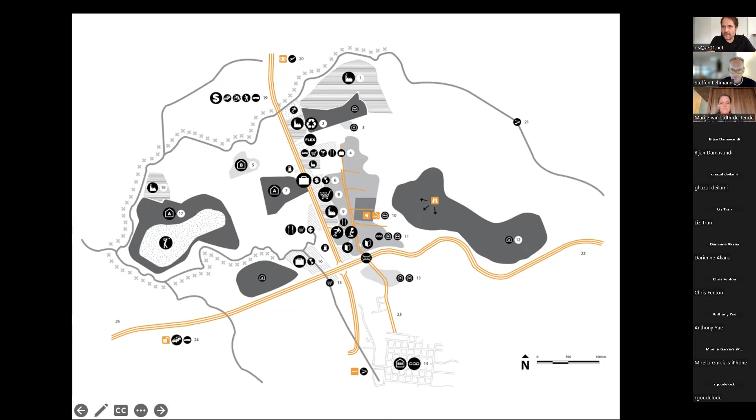You also see clearly the rivers surrounding it, and often in the case of the greater metropolitan areas, the rivers are viewed as borders. That's why we put crosses there. It's really seen as the border of the town, instead of looking at it as a potential high quality urban space. There's issues of insecurity, shown in the orange square with the lock, and there's also positive issues like nice smells that you have near restaurants.

With all of this, we created what we call a family of icons, and these icons represent both perception and behavior. Perception is the way people view the world, and we combine it with behavior and attitudes, how people use the surrounding urban space, how they behave towards each other. We're practically talking about culture, and that's why we focused on these two aspects and split it up into this family of icons.

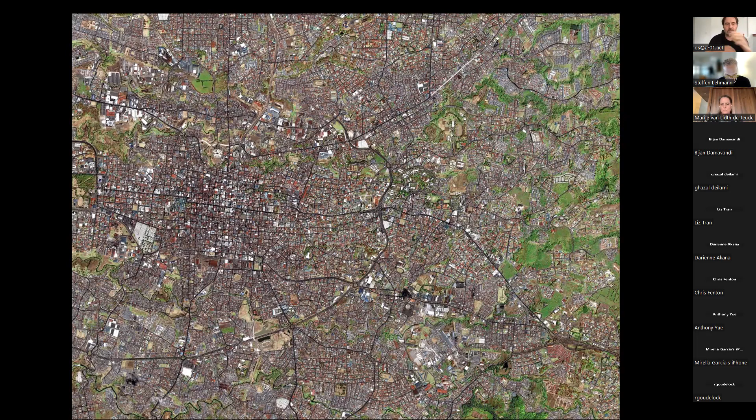We analyzed also this model of a city - we call it a city, the greater metropolitan area, but of course it's 4 cities combined. Actually, it's 31, because there are 31 municipalities in it.

We started comparing this also with other typical cities known for their widespread development, such as Los Angeles, which is actually only two-thirds of the territory of the greater metropolitan area but has 2.5 times the amount of population per square kilometer. We also compared it with other models like Manhattan, which has even 20 times or more the number of people per square kilometer on a much smaller footprint.

But of course, Manhattan depends a lot on the outside, for example agricultural production, whereas in the case of the greater metropolitan area, although it's called a metropolitan area, there's a lot of agricultural areas as well. So it's this urban hybrid, as I also said at the beginning.

We also analyzed ways people can move between the 31 different municipalities, 31 different towns, and the bigger centers of San Jose, Alajuela, Heredia, and Cartago, the 4 metropolitan areas, through motorized transport, but preferably collective motorized transport like buses, and even better the train, which at the moment we were doing this investigation was also reinstated in this area. Before that there was no train traffic, and now there is, but it's still quite limited - not near what we are used to in our countries of origin in Germany and the Netherlands.

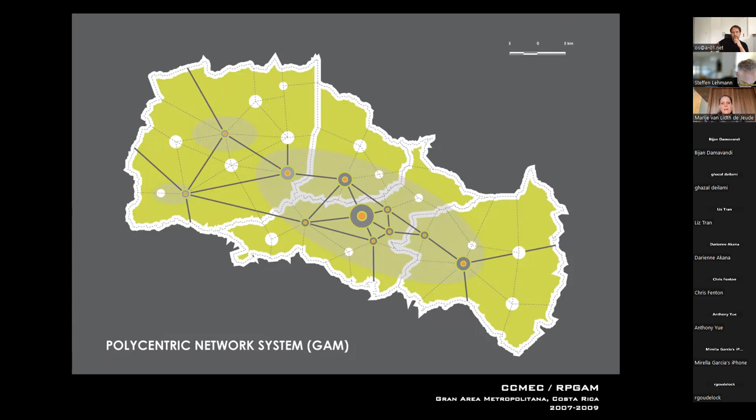And we analyzed also, okay, but how could these centers, these city centers look? How could we make that more sustainable by creating a multifunctional, compact urban center where people don't only live and then take their car to drive to the center of San Jose to work, or to go to the university, or to do shopping.

How can we create these functions within the limits of the city centers, and also use green arteries to mobilize ourselves and move from one place to another by foot or by bike, using non-motorized means of transport.

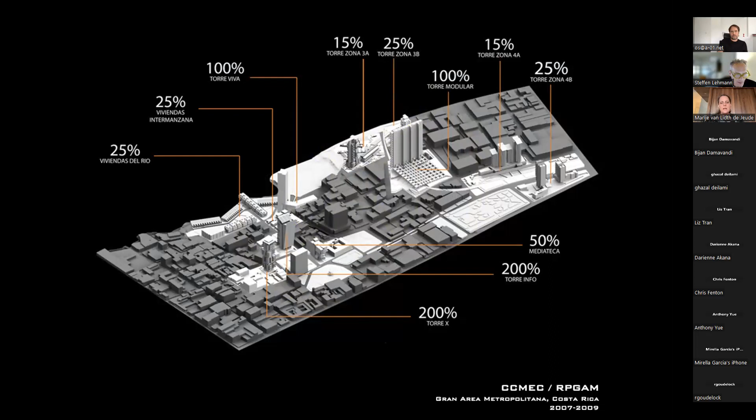Another analysis we did, and all these analyses we did with the University of Architecture in Costa Rica, looking at different concepts and models together with a group of architecture students. Here we see an analysis of different urban acupunctures and the densities that could be created, and how this could look in one of the centers of San Jose, the central districts of San Jose.

Here's an image of the same area where we also look at what is called the Trama Verde, looking at how to connect different green spaces within the city through green arteries, often rivers. There's 870 kilometers of rivers only in San Jose, but also through streets which have a lot of trees.

And these green arteries are not only interesting for moving from A to B, or for recreational purposes or sports, but can also be used for commerce and for institutional purposes or even production of food, for example.

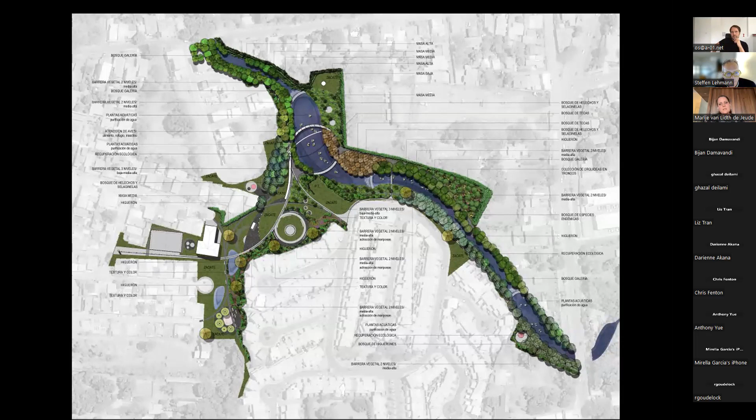And we made an actual project for this as well in the city of Ciudad Colón. That's where we are living. We worked together with the communities bordering a river called the Pacacua River, through a participatory design process where we included all different sectors of the population, with various sessions where everybody could indicate what they would like to have in this urban river park.

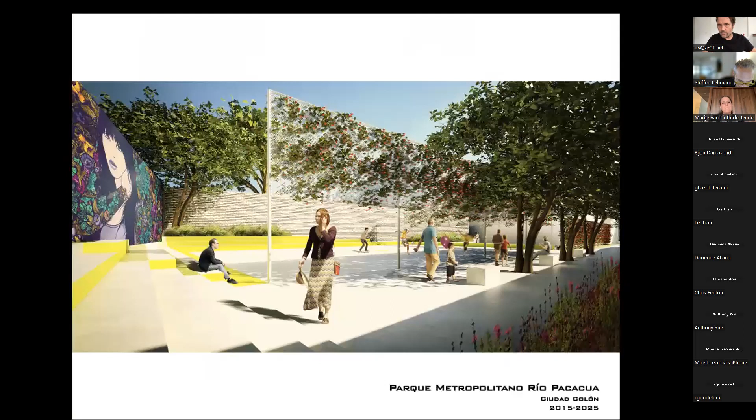And then we did a process of prioritization, to see that yeah, there's a lot of ideas, but we cannot do everything. So we had them decide on what to do, what would be prioritized in the first phase.

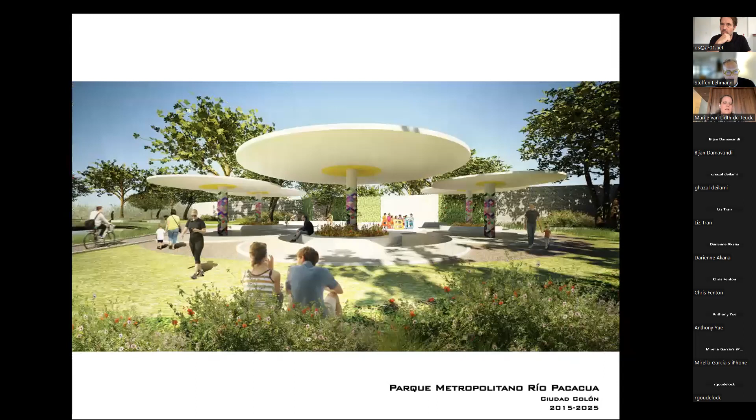And so they came up with all these kinds of elements, which you also see here in the visualizations of the final proposal, including art in public areas, green walls, shaded areas to sit or even give environmental education, and possible mobilization by bike and by foot.

We also looked at the river, because as I said, there's only in San Jose 870 kilometers of river, but they're mostly very polluted. So we also looked at what to do with the solid and liquid waste, through physical nettings, but also use of different plants to clean the waters.

And these are, of course, high quality urban spaces where you could enjoy nature and even meditate.

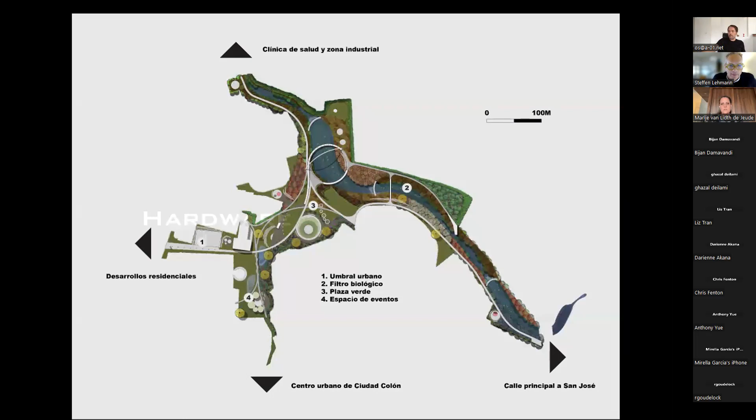So this is a combination of what we call the hardware, the physical infrastructure, and at the same time the software, because in order to create this kind of river park, you need to create a new urban culture. People need to see that these rivers are high quality spaces, otherwise they will keep on contaminating them.

So it really needs, you cannot start with just one, you need to do it all in parallel, because as soon as you start putting the river in the center and people see the river, they maybe also start to take care of it, especially if they are the ones who decided on what kind of elements to include in such a park.

These rivers, as I said, are very contaminated, and they all flow into one main river called the Tarcoles River, which is one of the most contaminated in Central America, and in Costa Rica. This one flows into the Gulf of Nicoya, and in that Gulf there's an island, the biggest inhabited island of Costa Rica, called Isla de Chira.

This fisherwoman is from there. There's 3,000 people living there, and fishing is a very important aspect of their economy.

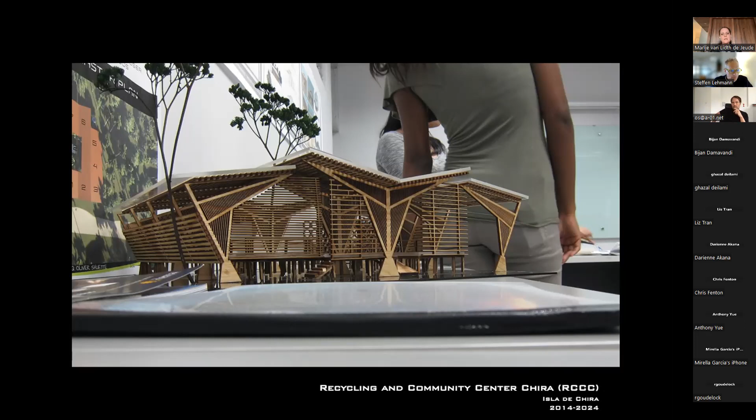This would add value to these recyclables, not only bringing the plastic and paper to the mainland, but adding value to it and selling it for a higher amount, like the jewelry they make from the closing clips of cans together with cloth. This way they can generate extra earnings apart from their fisheries.

We also went back with the students to show the different proposals. There were 8 proposals made, and all the student groups made models so the women could really understand how it would look. They were able to communicate what they liked, what they liked less, and what they would change. It was a sharing of knowledge and interests where students learned about how people live on the island, and the islanders learned about architecture.

We brought this final proposal, which was developed further through our foundation, to the Venice Biennale in 2016, together with 8 other rural acupunctures developed with Prairie View A&M University from Houston.

Apart from the Recycling and Community Center—we don't call it only a recycling center because it became bigger with a lot of functions, so we call it a Recycling and Community Center—there were also proposals for a floating restaurant, an artist in residence, or an elderly daycare. There are so many needs on the island, actually.

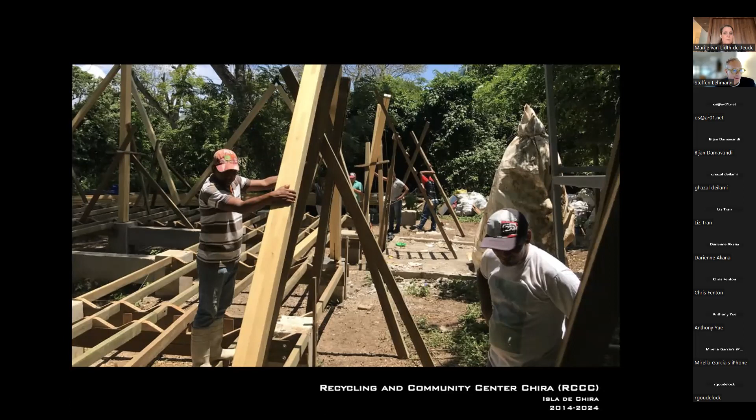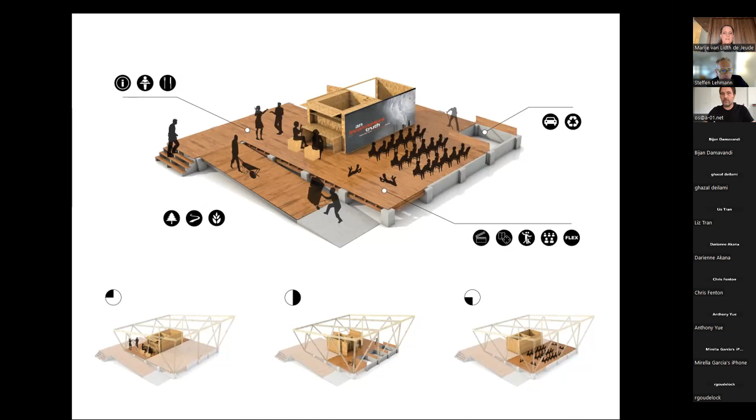All the different ideas for the community recycling and community center we included in what we call a toolkit of recycling and community centers, which could be applied all over Costa Rica. It has elements we always try to work with, that it's multifunctional with different uses throughout the day for different groups of people on the island: youth, elderly people, the community as a whole, the women that do the recycling process, etc.

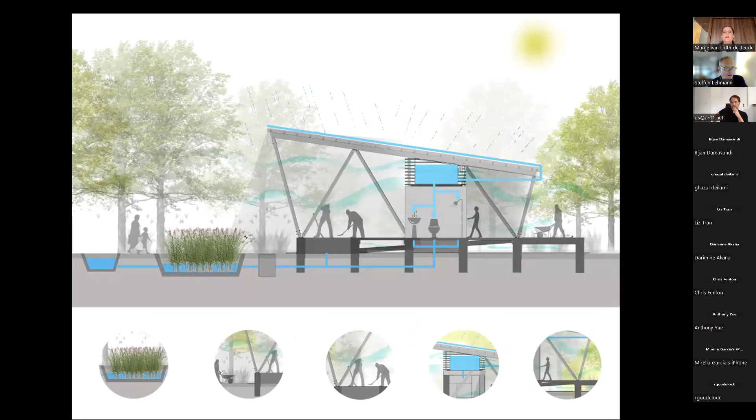We also included elements of passive bioclimatic architecture: shading, natural ventilation, capturing rainwater to use for outside irrigation in a vegetable garden, and making sure that no liquid waste goes into the sea.

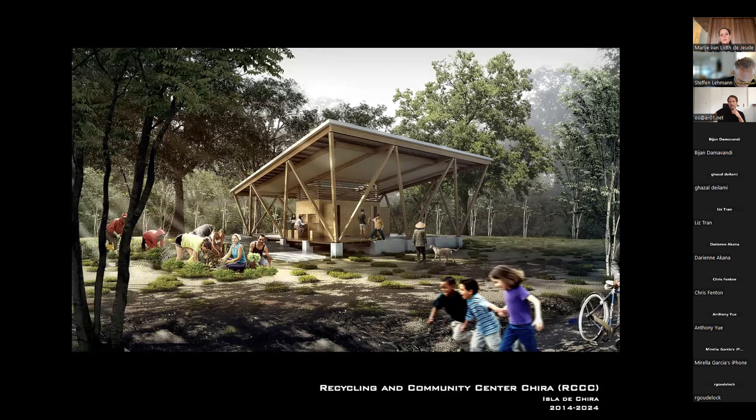It's really this combination of elements, which also helps the local economy and helps improve the health of the people through more healthy food with the vegetable garden. It has a lot of different elements, which made us win an honorable mention from the Buckminster Fuller Institute, as they said the center systematically addresses multiple immediate needs of the community.

Presenting an integral strategy to improve well-being and meet resource needs. This integral strategy is really central to the way we work.

Also in this last project that I want to present, before giving it over to Oliver, which was done in Curridabat, we used methodologies of participatory design. These were neighborhood improvement projects in different neighborhoods of Curridabat, where we worked with the neighbors, the citizens of those neighborhoods, and also with different sectors of the population: more elderly people, youth, even children, because we think it's important to take into account how they see their urban surrounding, how they use their neighborhood, or what they are missing.

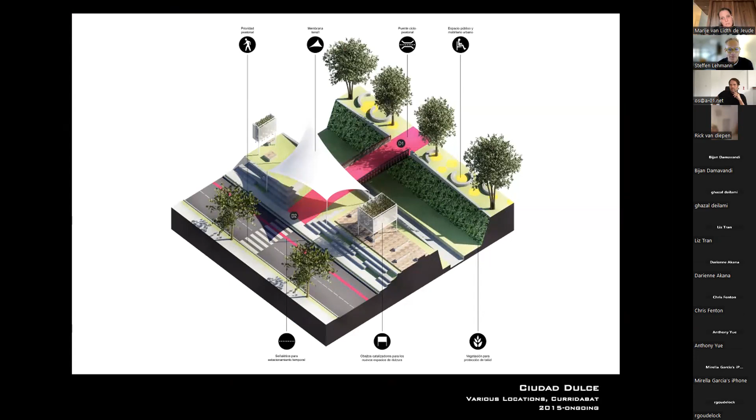We've also gone for this social cultural mapping. We went on walks through the neighborhood together with the neighbors of those different areas, and together we developed different ideas of urban acupunctures, as we call them. We also call them sweet tools, because by now this city of Curridabat is known as the sweet city, because there's a whole idea of bringing nature back into the city to attract pollinizers, and even seeing these pollinizers as part of the citizens.

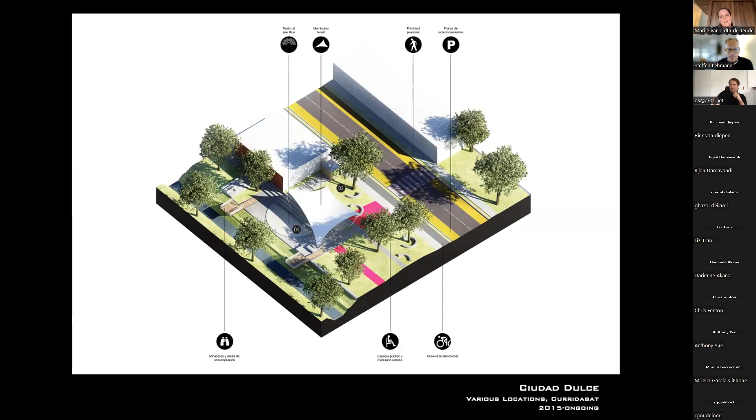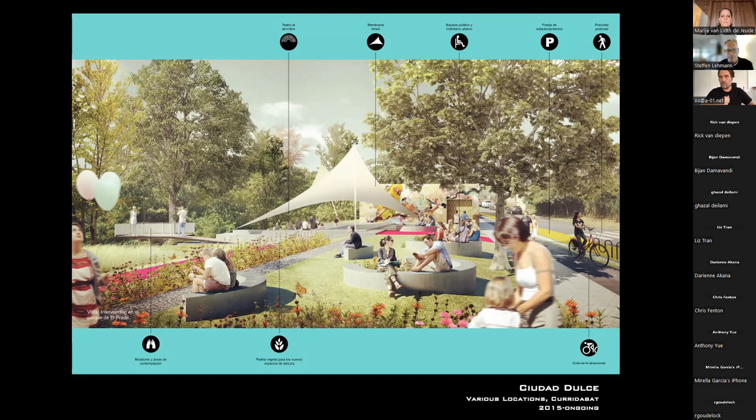We worked a lot with green elements, nature elements, green walls, facades, green roofs for shading, and areas for recreation, for getting together. As I always say, public space is so important to strengthen the social integration in a neighborhood, because that's where people come together from different classes, different ethnicities, different ages. Only in public space do you see this melting pot of different people from the city, which is very important for social cohesion.

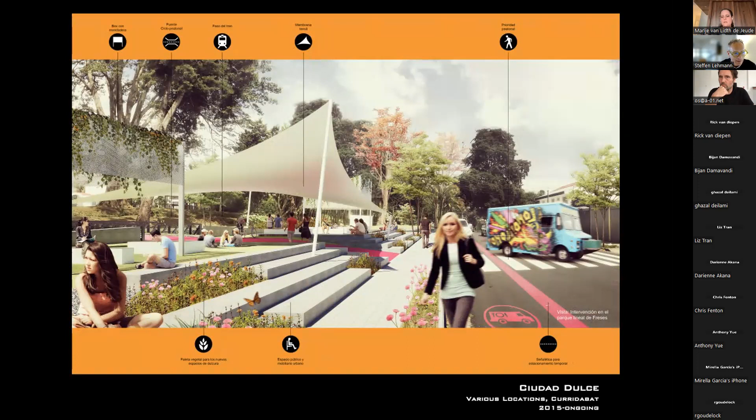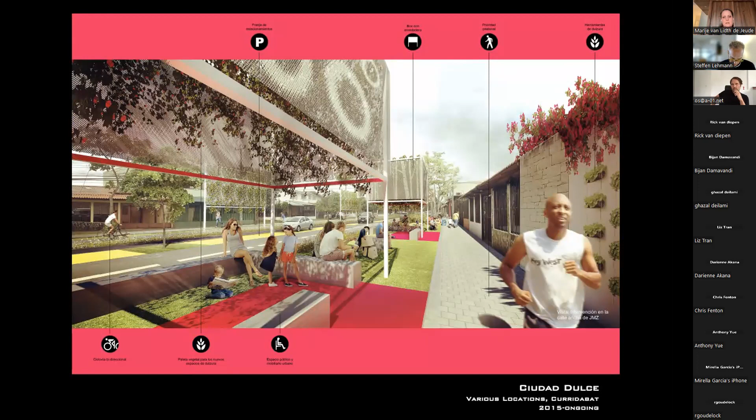There were also areas for food trucks, so local economy was strengthened, and areas for running, to live a healthy life—sports, cycling, etc.—and specific areas for children as well. All these individual proposals were brought together in a bigger master plan for the three neighborhoods we were working with, to also strengthen the integration between different neighborhoods of one city.

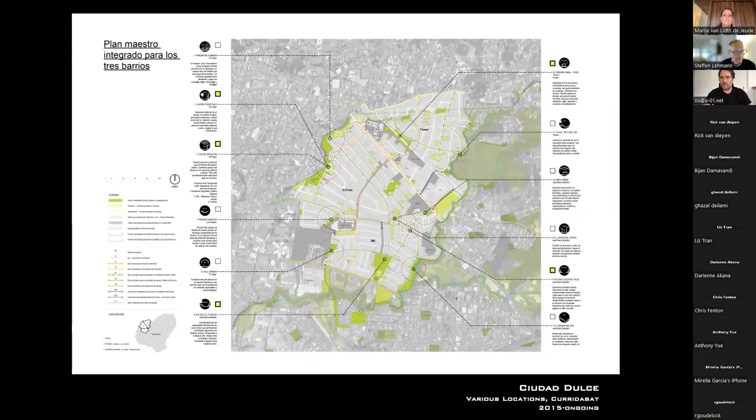Very interesting and very important also is that this project got various awards. Among others, it was called one of the inspiring practices of the new urban agenda during the Habitat 3 conference, which is held every 20 years, the last one in Quito, Ecuador in 2016. It also won the award of Wellbeing City in 2020, where it won next to world-known cities with really high budgets, which Curridabat is not—like New York, Buenos Aires, Bordeaux, and Curitiba.

Now I go out and Oliver goes in with a film of this sweet city. So I'll stop sharing.

All right, let's see how we make the transition. Should work well. Can you see my screen? Yes. Great. Let's see if the audio was shared as well. I think not, I'll do it again. There we go.

As Marije was saying, here's a little clip with the current mayor of Curridabat. It's also interesting to say that he's already the third consecutive mayor working on this program, which is rather unusual for Latin American cities. You could say there is this kind of political continuity to carry a project through time.

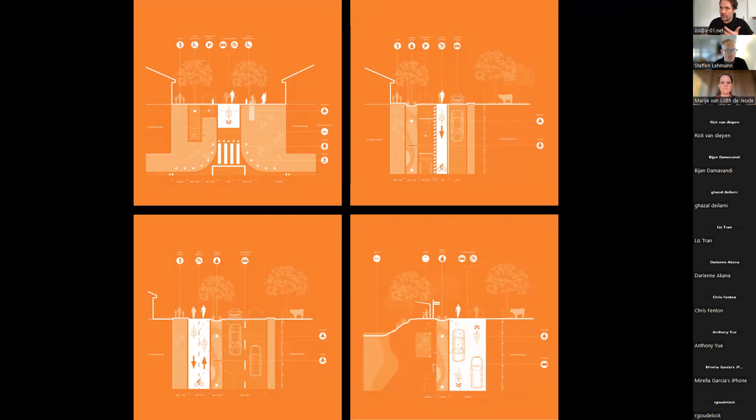We were contracted by the local Association for Integral Development, called ADI, the Asociación de Desarrollo Integral. Together with the main actors from the area and all the people who wanted to participate, we created new kinds of sections for streets, this new mobility concept to get the people in and around La Fortuna and create different scenarios for inhabiting the street: making streets for all within the urban center, creating the idea of shared streets, getting people through the streets safely, and creating access paths between the different villages that are significant for the area.

We also created a segregated bike lane for the high-speed traffic that goes through on a long distance in this area on the national road, and a path for adventurers around the Arenal Lake, which promotes ecotourism in the area.

These concepts are very significant for us because on one hand they promote a new kind of urbanity. In the different projects, we promote reaching different points of interest at short distance. In COVID times, we also talked a lot about the 15-minute city, so I think all these concepts are represented in what we've been working on, in the sense that we want to create more quality public space, and on the other side, we want to reduce the necessity for motorized transport.

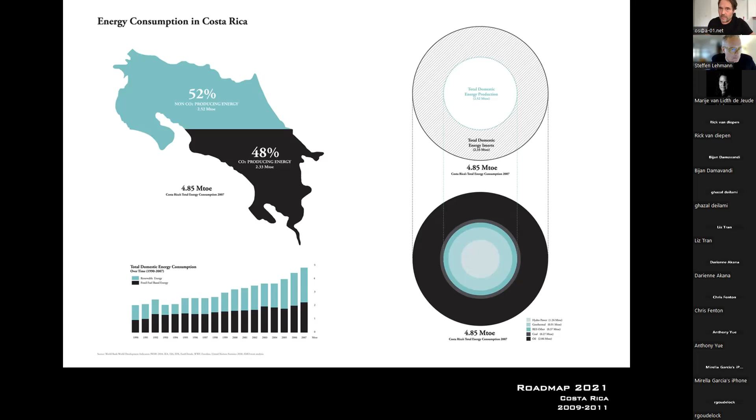And you see, looking at the greater metropolitan area as a whole, proposing compact and multifunctional cities - these are the kind of moments where we intend to lower carbon emissions at an urban, regional, and even national scale.

So part of the roadmap is also the proposal to maximize renewable energy production. That is something very interesting that is already going on - over the last 8 years consecutively, Costa Rica has produced almost 99% of its entire energy household through renewables. And then the roadmap is also showing how you can gradually decarbonize the different contaminating sectors.

So we look at power creation, and most of all, once again, transport, a significant contributor to carbon emissions in Costa Rica. We also looked at industry, buildings - we'll get to the no footprint house in a sec - and agriculture and other sectors as the main contributors to the carbon footprint in Costa Rica. So the roadmap shows how to decarbonize gradually.

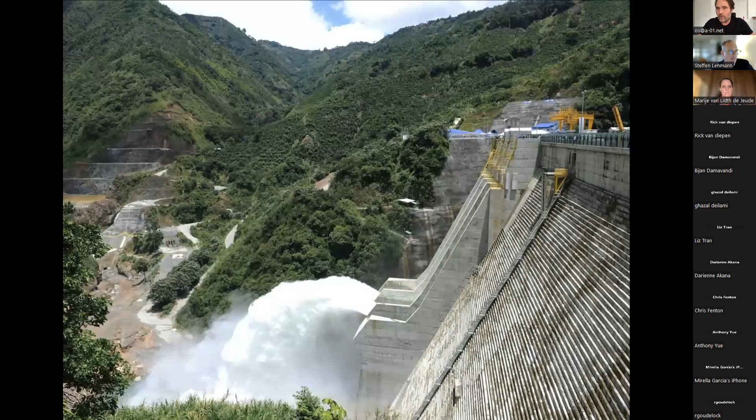The original plan, or what the roadmap as proposed with OMA and AMO had suggested, was to decarbonize until 2021, which would have been technically possible. But obviously, we're talking also about a very political project here, something that needs to be built up very solidly in order to be successful. So this took more time than planned, but on one hand, as said, there was already an increase in terms of renewable energy production, which is mostly hydroelectric in Costa Rica.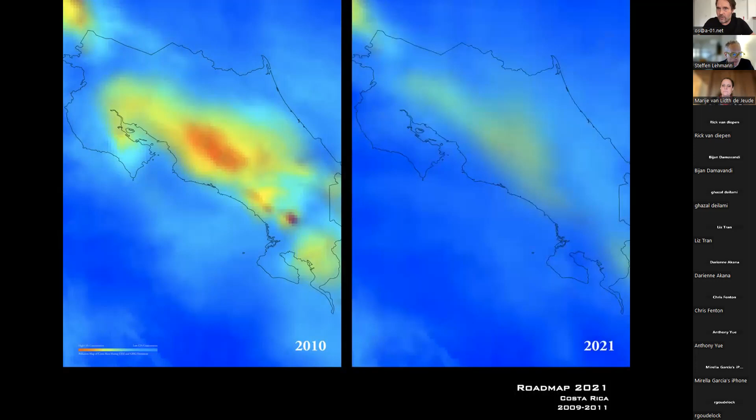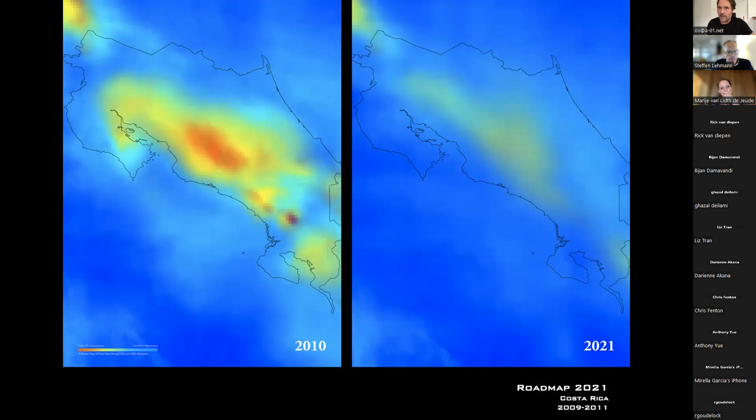And the goal of the roadmap, as said, was to decarbonize the country from 2010 to 2021. Here, the major red area, which is the kind of peak of emissions you see in the center of the Costa Rican map, that's actually the Central Valley of Costa Rica, where the greater metropolitan area is located. So you probably understand through these graphs how important it is to tackle the hotspots in terms of mobility-related issues and other carbon emissioning sectors. And this is a kind of graphic representation of the plan as a whole.

It was this gentleman here on the left, former President Carlos Alvarado Quesada and his government, that finally ratified a roadmap in 2019, now targeting decarbonization of Costa Rica up until 2050. The plan exists, it's in place, and we think this is also a very important statement from the Costa Rican government to say that we want to decarbonize the country as a whole and be a role model to other countries that might follow suit.

This idea of the roadmap and plan for decarbonization was also represented at the pre-COP. The COP is the International Climate Change Conference by the United Nations. There was a preliminary COP in Costa Rica in 2019, which was the 25th COP meeting, and then by the end of the year there was a main meeting in Madrid where we also participated.

On one hand, to speak about sustainable cities and the possibility of nature-based solutions in an urban context. On the other hand, we also presented this project here on the left, which is called the No Footprint House, which basically responds to the idea of the decarbonization of Costa Rica as a whole.

It was also very important for us to show case study examples to say, well, what does it mean to decarbonize? Because many people think it means or implies less life quality, that they cannot take hot showers anymore, or they're not allowed to get around. So we wanted to show that decarbonization can be beautiful and sexy. With that in mind, we showed case studies like the No Footprint House to demonstrate what it actually means to live a decarbonized life.

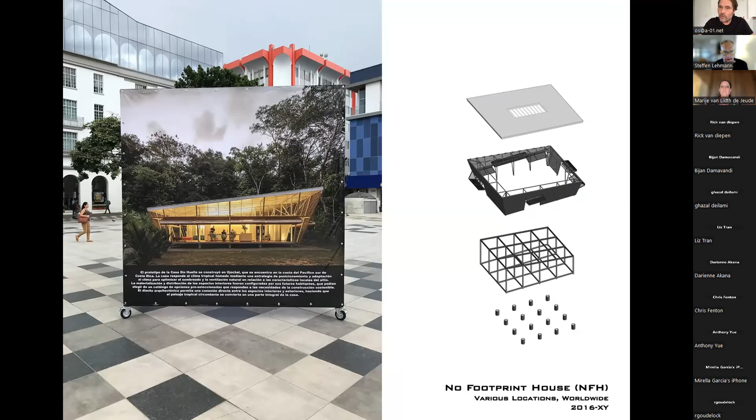The No Footprint House is basically a modular systemic design. There are different options for foundations, for the building mainframes. There's a double layered facade, and very importantly, different proposals for the roof, undoubtedly one of the most important building components here in the tropics.

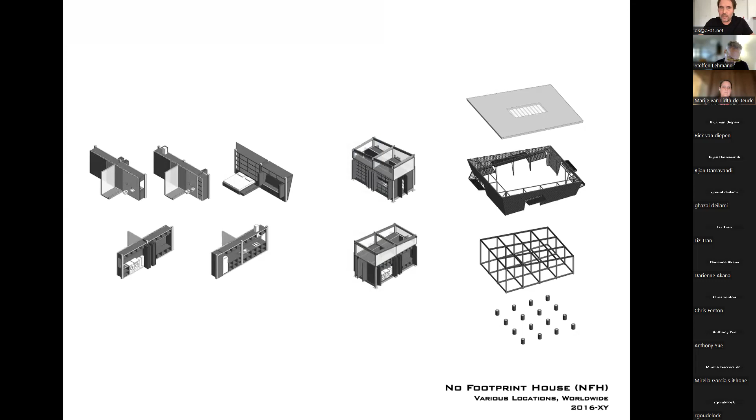We combine these main components with what we call the furniture plugs. On one hand, there's what we call a central service core, which sits in the middle of the first prototype we built. And then we also have additional facade plugs that you can locate in a double layered facade. This gives a very interesting and high level of versatility to create different configurations.

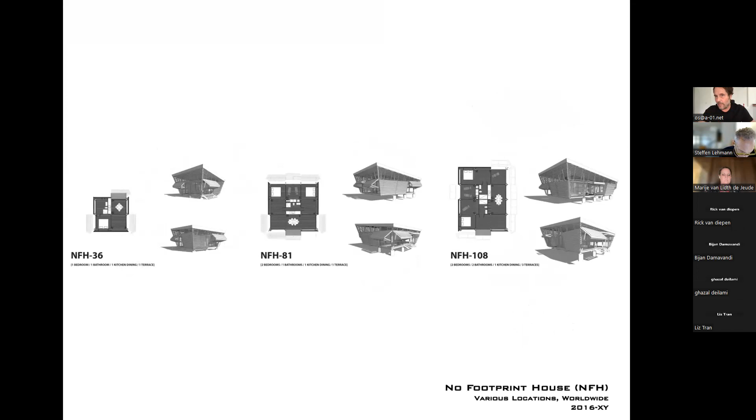Here are some examples of these configurations. Obviously, speaking to potential clients and bringing this project forward, we also wanted to show what you can do with this design toolbox. These are three different configurations, buildings in different sizes that respond to the typical typologies that are built in Costa Rica.

We started to look at this building here, which is the NFH 108, as the first typology we wanted to build. In these diagrammatic representations, there's this idea of opening the building up towards the outside, and really creating this synergy between inside and outside spaces, which is such a beautiful design feature and quality for architecture in the tropics.

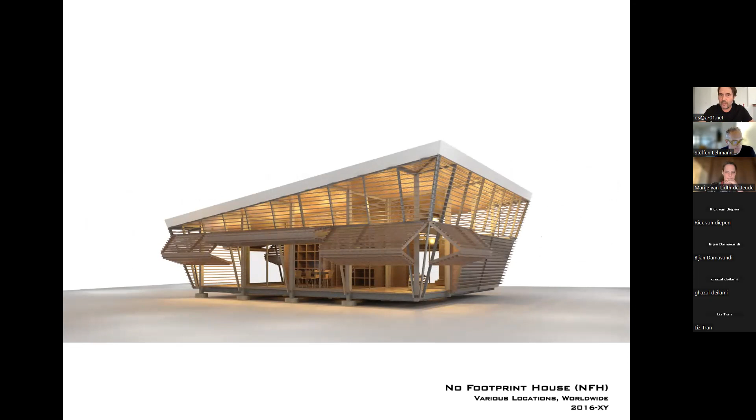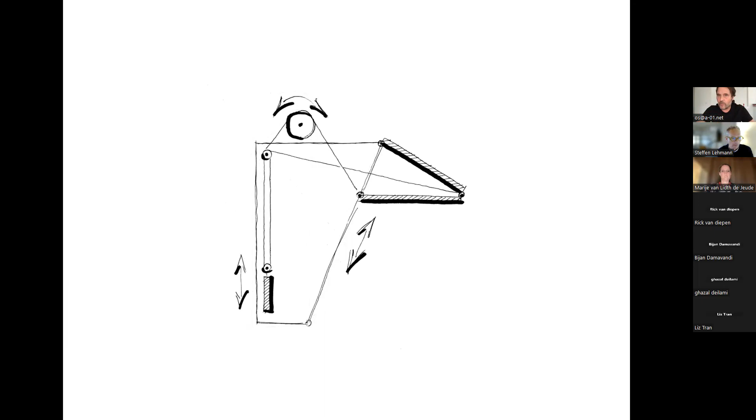By incorporating these mechanisms, these counterweighted pull-up mechanisms in the facade, we were able to lift entire sections of the building open in order to create this feeling of living inside out at any moment that the client wishes to do so.

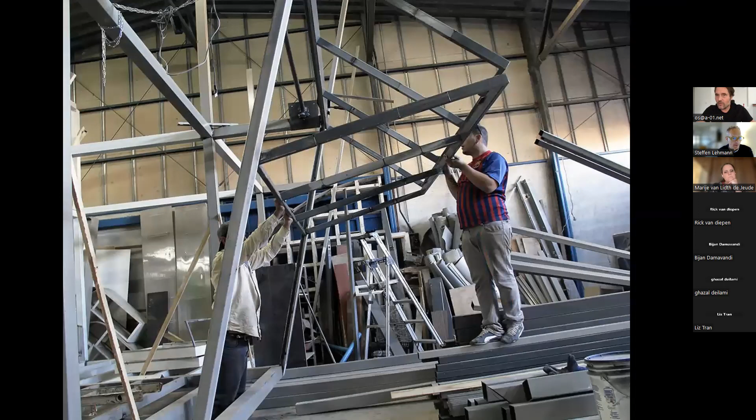Specifically, this mechanism was a bigger nut to crack. The building is also based on the idea of prefabrication, so we prefabricated the prototype in the Central Valley, which is also the center of all industries here in Costa Rica. Here you see one of the first prototypes of this bifold gate, which is such an important and significant part of the building design as a whole.

Once this was resolved, we basically put the whole house on a 40-foot trailer. And here in the back, you also see the central service core that sits in the center of the building.

We brought it overnight to its target location, in the southwest of Costa Rica along the Pacific coast. Then, based on the pre-established foundations, we set the central service core onto the foundations, and basically built the building all around it.

The central service core is plugged into the local grid structure, feeding into the local water and electricity systems. We decided to connect the building to the local grid because such a high percentage of it is fed by renewables in Costa Rica. Compared to importing solar panels for a house, it was overall much more sustainable to say the grid itself is sustainable, so of course we plug into it.

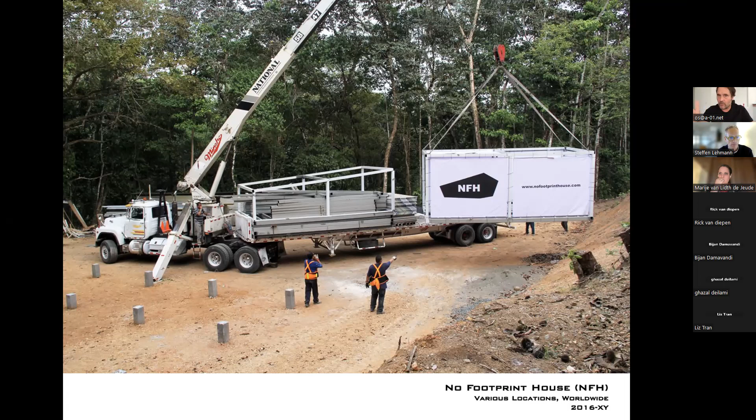You see how parts of the facade can open up, and in this section you can also see what the building is really based on: using locally the power of the sun. What we do is heat water with a thermosolar system, because heating water can consume a lot of electricity if taken from the grid, so instead we heat it locally.

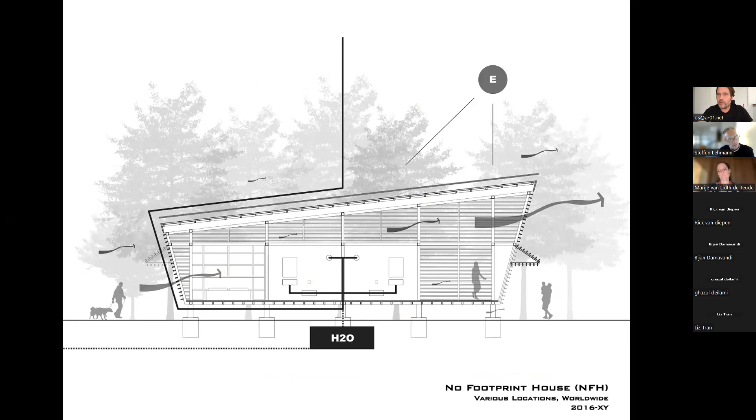We also recollect some of the rainwater to use in the gardening and in the gray water areas of the house. Very importantly, the whole building is based on the principle of natural ventilation.

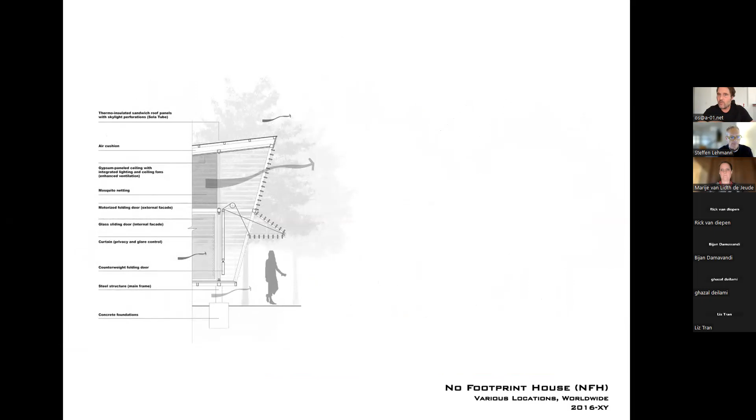Here you have a close-up of the facade section. On the left you see how the counterweight mechanisms are situated within this double-layered facade. Here, to get an idea of scale, you see how a person can inhabit this space, with part of the facade sections open.

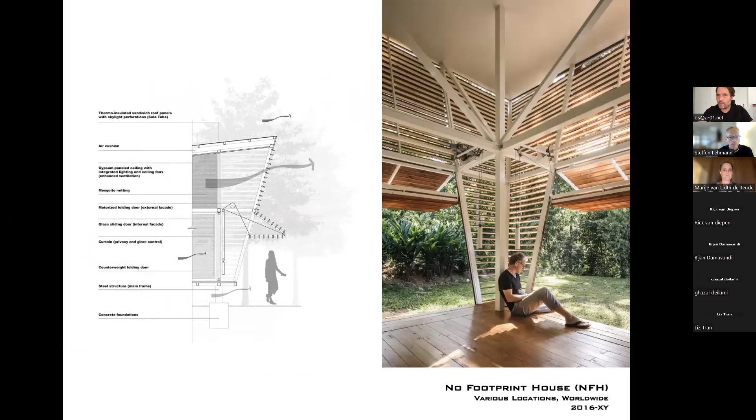This is an overview of the building in its context and natural environment. On the right side is another important design feature: the sleeping rooms and private areas, which we call the cocoons, can be protected by glass sliding doors and curtains to create acoustic and visual protection on the ground level, while the main social areas remain open or can be opened completely.

In the upper section of the building, you see mosquito nettings mounted in the back of the outer facades to prevent insects from coming in. In this photo, on the right in the back, you see two furniture plugs. This client chose one that situates the bed, so you can relax and lay back in the niche of the bed, and towards the front a closet plug, which was the configuration these clients chose.

The social area can be opened up completely, and the environment this project is built in allows for that in terms of still living well without being eaten by insects. For most of the year the building works without the mosquito netting, but we still put it in the private space. We're now building in more humid areas where the whole facade is also protected through mosquito netting, so you can adapt the layers of the building to respond to local site conditions.

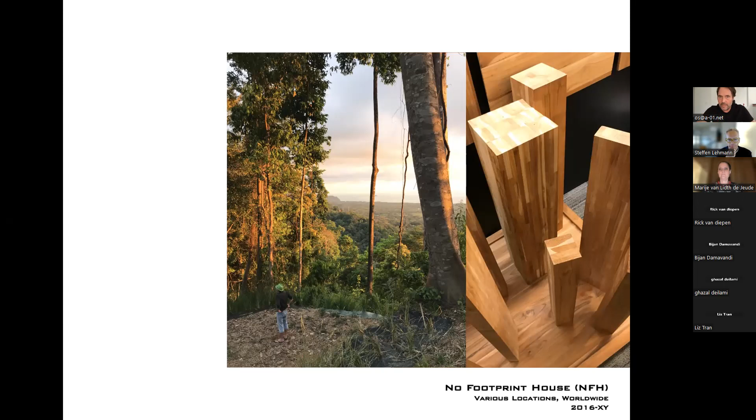So on the one hand, we're reproducing the initial pre-designed typologies. On the other side, we're also doing completely customized design. And with these people above Uvita, we created this project, which is a 2-story structure, a no footprint house.

Built entirely in wood, this gives space—it's a big house, but it's also a big family. They have 6 children together, so that's a family of 8. Yeah, they were very productive.

So like this, we have the opportunity to, on the one hand, create different material configurations, and on the other hand, also create different building configurations and sizes. And this building is actually 80% decarbonized, which is the maximum we can do at this point.

These last 20% we cannot eliminate, given what is possible in terms of building technology in Costa Rica, but we can compensate for these last 20%.

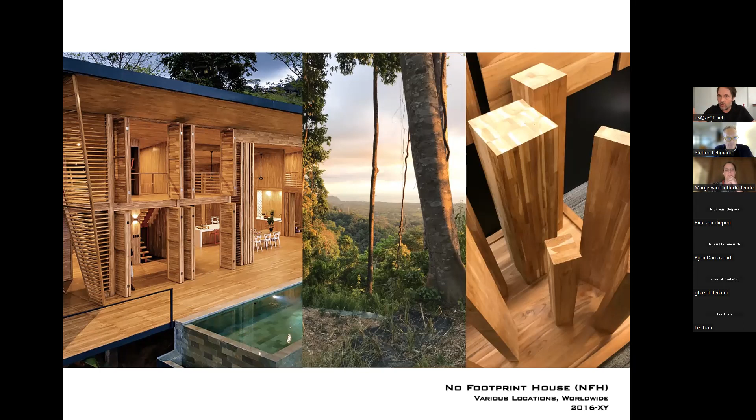And that is something very interesting to take into account as well, because through the production of energy locally, or through reforestation, we can compensate for these remaining 20% and thus become carbon neutral or even carbon positive, according to what the client wishes to do.

And for us, it's also very important to have these partners in our projects. Obviously, as said, all this is based on a team approach, or what we call a multi-stakeholder approach. So entities like Novelty, or for example the Green Lab, a French company with whom we're now collaborating.

To create hempcrete panels that we're going to use in some upcoming projects. These are very important allies for us in order to do the architecture that we think is good to do, and that our clients think is the right thing to do.

And then we also collaborate with a group called Costa Rica Regenerativa. That is a very interesting entity because they promote regenerative development in Costa Rica. So the philosophy is to regenerate first and then take sustainability from there.

Together with Costa Rica Regenerativa, we have started working on a couple of projects. And in collaboration with Costa Rica Regenerativa and a university here called the Universidad Latina, we also started a regenerative architecture workshop, which looks into architectures that respond to the principles of regeneration.

And we also invite students and universities from other countries to come work with us, come talk with us about sustainability or regeneration. So being here with all of you, I think that is also an open call. Please come, organize yourselves, come to Costa Rica, and let's have an online or, much rather, on-site session here in Costa Rica if you can.